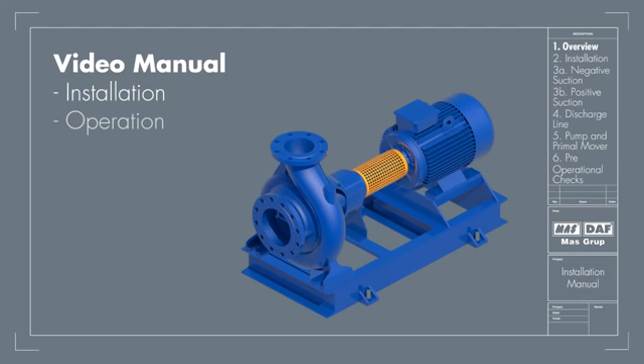Installation and Operation Manual for Horizontal End Suction Centrifugal Pumps. This manual contains instructions for the installation, operation, and maintenance of the horizontal end suction centrifugal pumps.

Welcome to the General Video Reference and Guide. Please read the product manual before installing the machine to get knowledge of how the pump works and how to install it. This is a brief overview and demonstration of the entire process covering the key points.

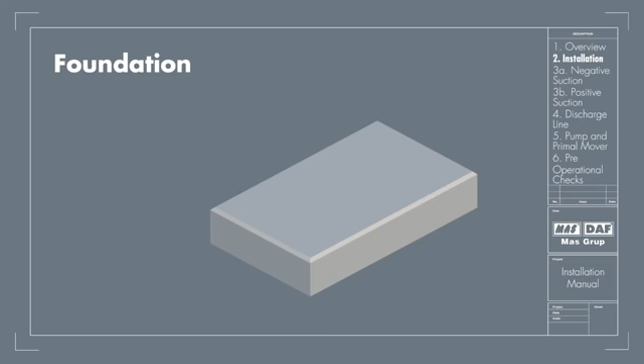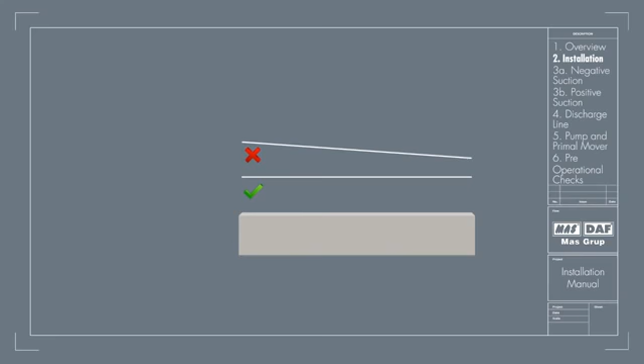Installation. Before installing the pump, ensure that the foundation on which the pump will be installed is prepared well. It has to be sufficient enough to take the weight of the pump and absorb any possible vibrations from it. The foundation has to be absolutely straight without any inclination. The foundation bolt of proper size should be embedded in the concrete and base plate.

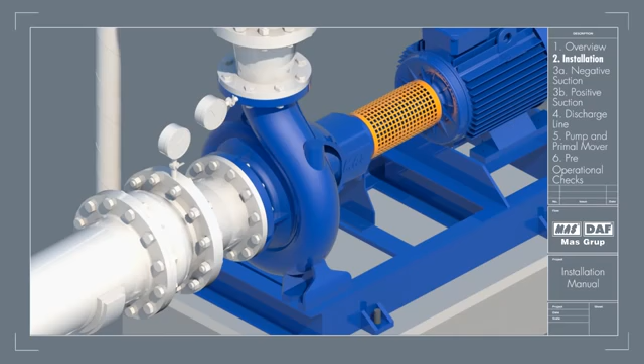Piping associated with the pump must be supported independently of the pump and should never put any strain on the pump casing. When the pipes are not supported, their weight is covered by the pump casing, and this situation may cause cracks on the pump casing. It's important that the connections are aligned axially, angularly, and in length carefully.

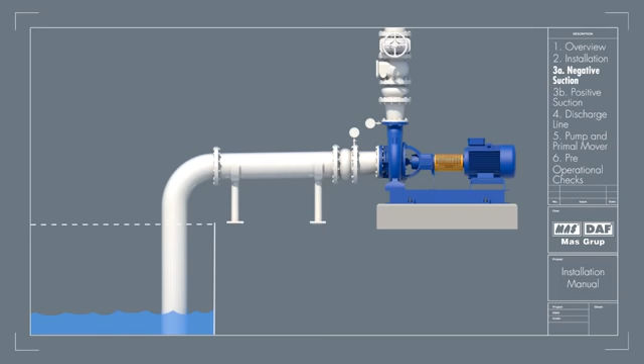Suction line, negative suction. The piping and the connection fittings should be properly aligned and supported separately. The elbow should be of long radius type. All suction piping must be airtight. The suction pipe should be sized to ensure a liquid velocity of not more than 2 meters per second. The suction pipe's size should be at least one commercial size larger than the pump inlet.

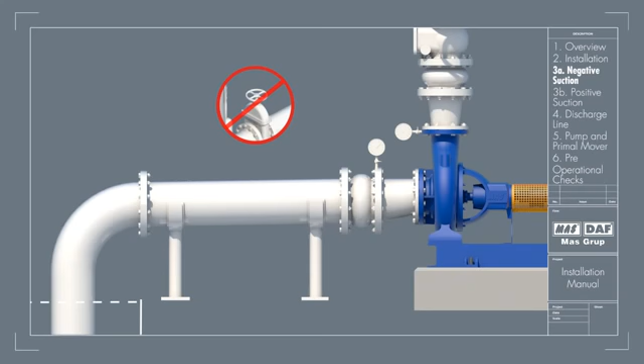All suction pipes should have a continuous rise to the pump suction inlet. 6 mm to 100 mm slope is recommended. No isolation valve is recommended. There should be a pressure tapping provided for installing a vacuum gauge in the suction line.

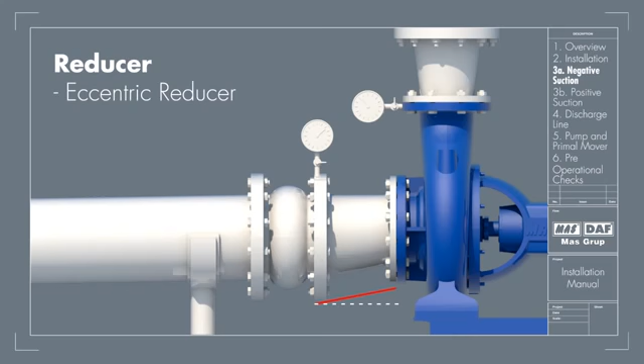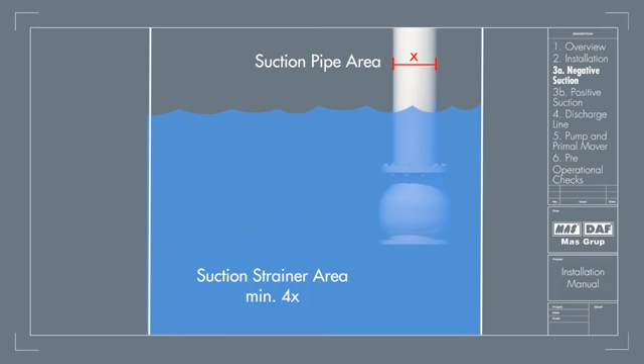The reducer joining the straight length of the pipe in the pump line should be an eccentric reducer with the inclined side of the reducer as the bottom side. The straight length of the pipe after the eccentric reducer should be 2 times the pipe diameter. The suction strainer must be at least 4 times the suction pipe area, and the mesh size should screen out solid particles that would clog the impeller.

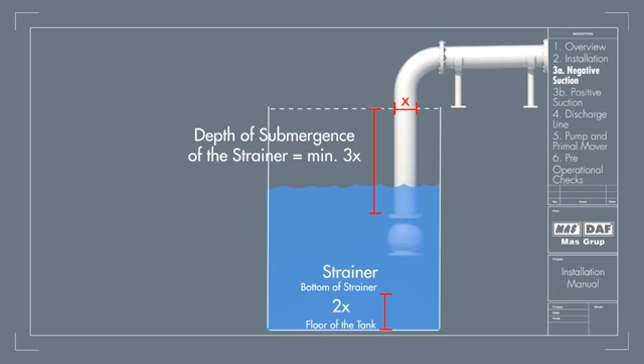The minimum depth of submergence of the strainer should be at least 3 times the pipe diameter, measured from the upper row of strainer holes. The distance between the bottom of the strainer and the floor of the tank should be 2 times the pipe diameter.

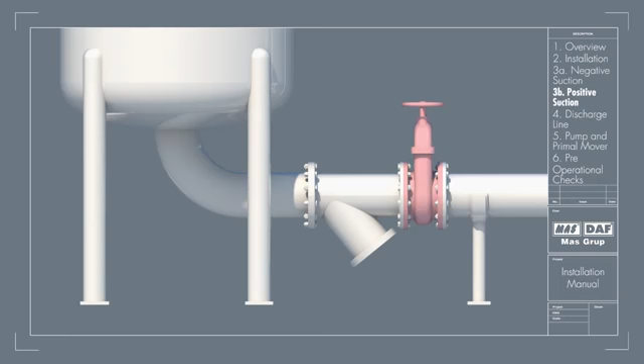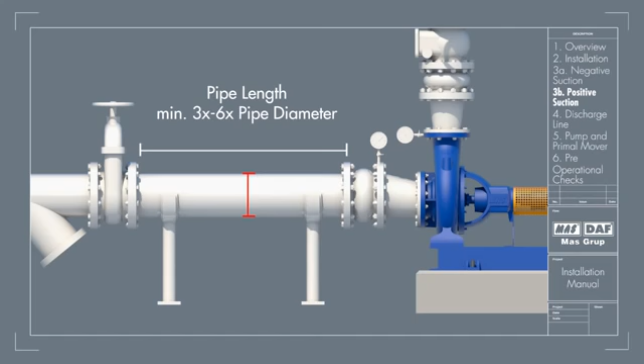Suction line, positive suction. In case the water is being supplied to the suction through gravity, a slightly different setup is needed. The elbow should be standard type or long radius type. An isolation valve should be provided in the suction line. The pipe from the tank to the pump should have a descending inclination. The straight length of pipe between the pump inlet and tank should be at least 3 to 6 times the pipe diameter. The suction pipe should be sized to ensure a max liquid velocity of 3 meters per second.

There should be a pressure tapping provided for installing a vacuum gauge in the suction line. The reducer joining the straight length of the pipe in the pump line should be an eccentric reducer with the inclined side of the reducer as the top side.

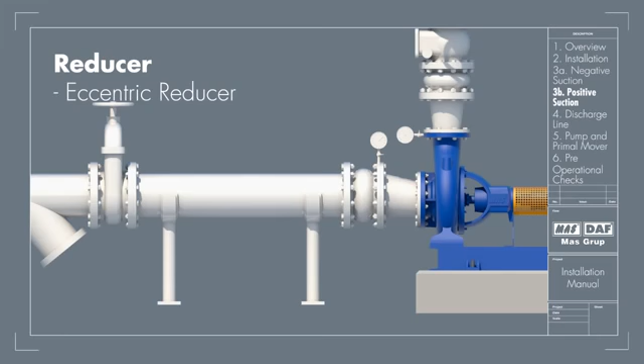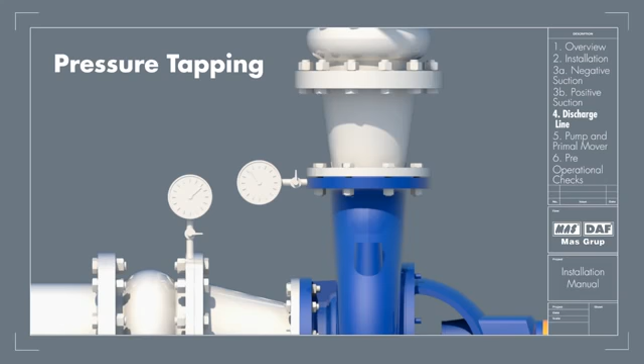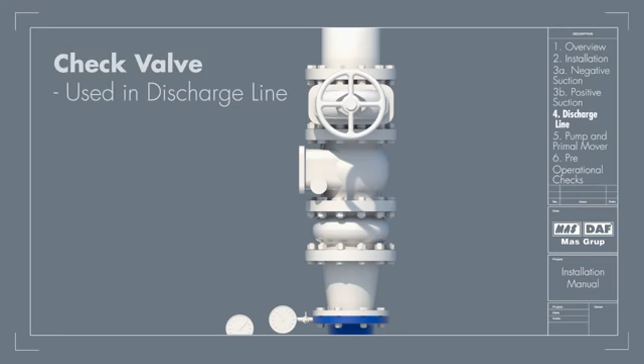Discharge line. There should be a pressure tapping as close to the pump outlet and before the isolation valve as possible to measure the pump shutoff head. A concentric reducer is installed in the discharge side to minimize the friction losses. To prevent reverse flow and protect the pump from hydraulic shocks, a check valve has to be used in the discharge line. The isolation valve is provided downstream of the check valve so that these can be taken up for maintenance, priming,

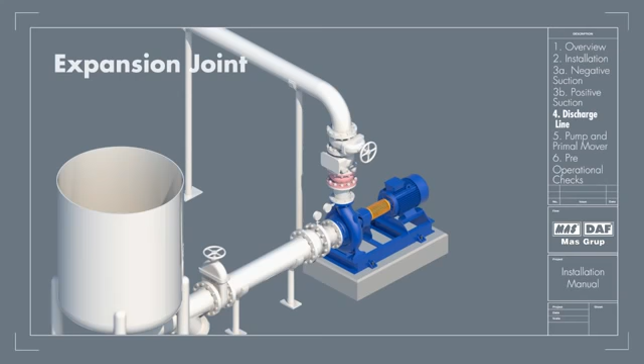and starting whenever required. Discharge pipe size should be at least 1 commercial size larger than the opening of the pump outlet. The number of fittings and size changes should be minimized to prevent fluid friction losses. An expansion joint may be used only after a careful piping analysis, especially when the discharge pressures are on the higher side.

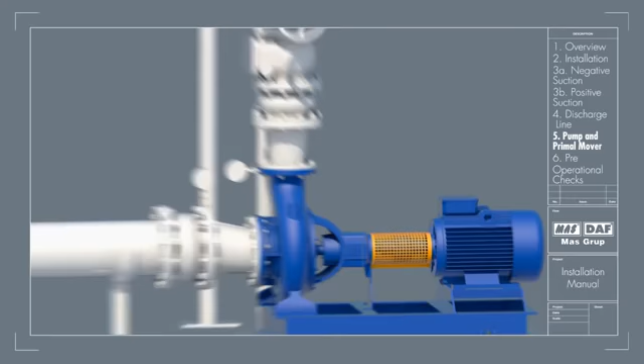Installation of pump and prime mover. The pump unit needs to be fitted using nuts and bolts before fitting in any pipes. The pump and the motor are aligned to the final tolerance using a reverse dial gauge or laser alignment tool. After the alignment is completed, the piping connected with the pump should be built. Once this is completed, the alignment of the coupling should be rechecked.

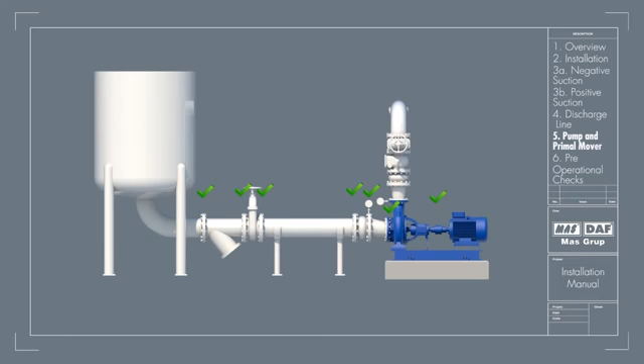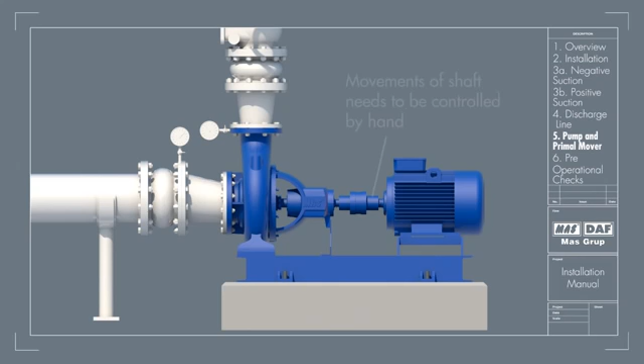Then the alignment of all piping and fittings should be rechecked and suitable corrections should be made. The motor should be wired correctly to ensure the correct direction of rotation. When the pump and motor have been coupled, movement of the shafts should be controlled manually by hand to see if it is rotating smoothly.

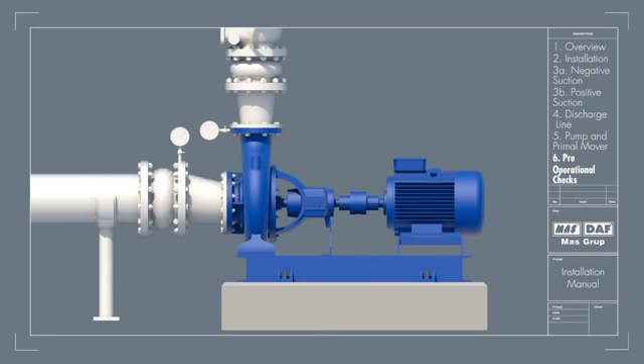Pre-operational checks. After checking alignment of the coupling, assemble the coupling guard and tighten the bolts. Ensure that the pump suction valve is fully open and all joints are checked for any leakage. The discharge valve should be kept closed to prevent overloading the prime mover.